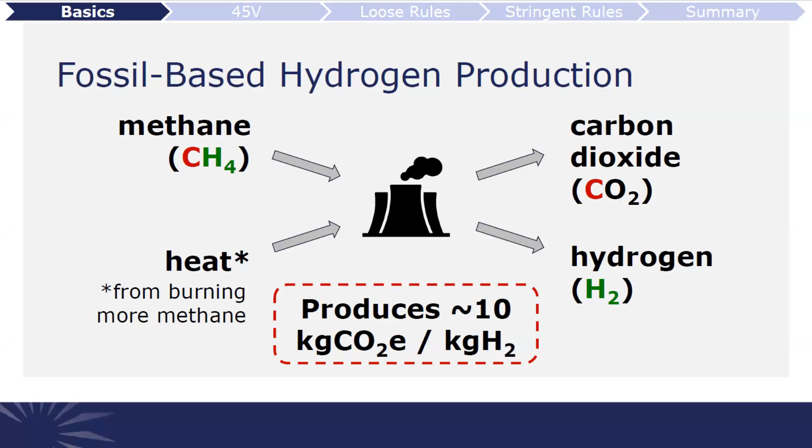So the only scalable way that we know today of making truly clean hydrogen is through a process called electrolysis, which splits hydrogen off from water molecules by using electricity. And this can produce anywhere from 0 to 50 kilograms of carbon dioxide equivalent per kilogram of hydrogen, dependent entirely on where you're getting your electricity.

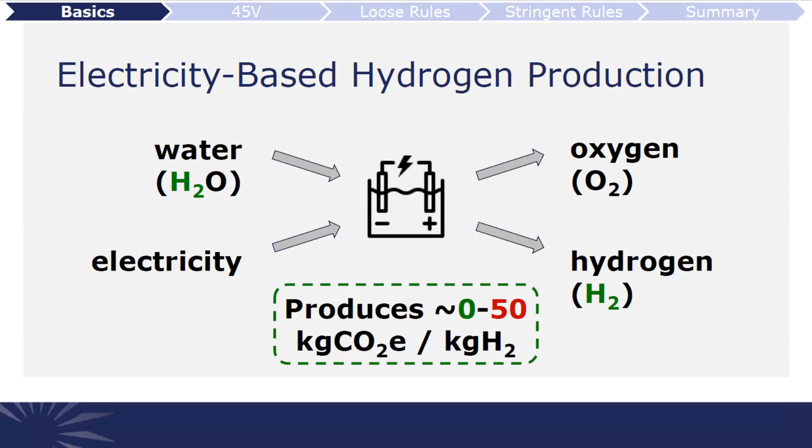So why do we need hydrogen? Well, it's mostly going to be used to decarbonize things that can't be easily electrified. These 3 waves of end uses come from the Department of Energy and where they envision it being used. So it's a lot of heavy industries, chemicals, aviation, commercial shipping, things of that nature. This helps clarify where you might expect to see hydrogen production, or at least transportation to those end uses. And second, these are really energy intensive industries. So we're going to need a ton of hydrogen to decarbonize all these processes.

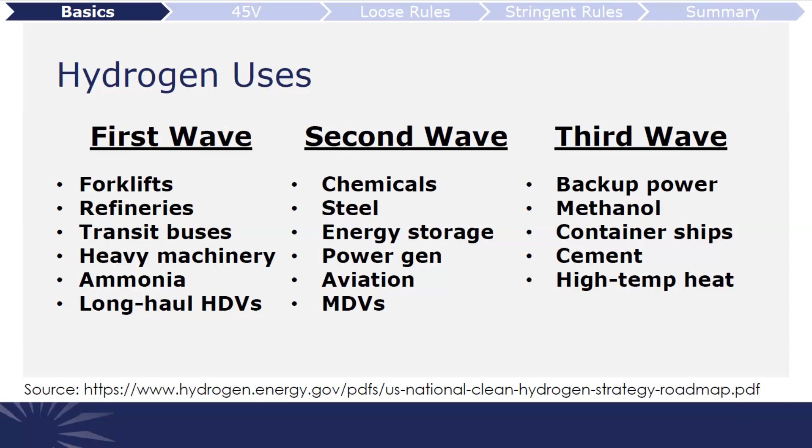So hydrogen wasn't really on the radar until a couple of years ago, and two federal laws have really accelerated its relevance. The first is the Infrastructure Investment and Jobs Act from 2021, and it sets aside $8 billion in federal funds for the creation of clean hydrogen hubs all across the country. The Department of Energy is still deciding where these hubs will be placed, but their purpose is to act as research and development for different ways of making hydrogen, using it, transporting it, and storing it.

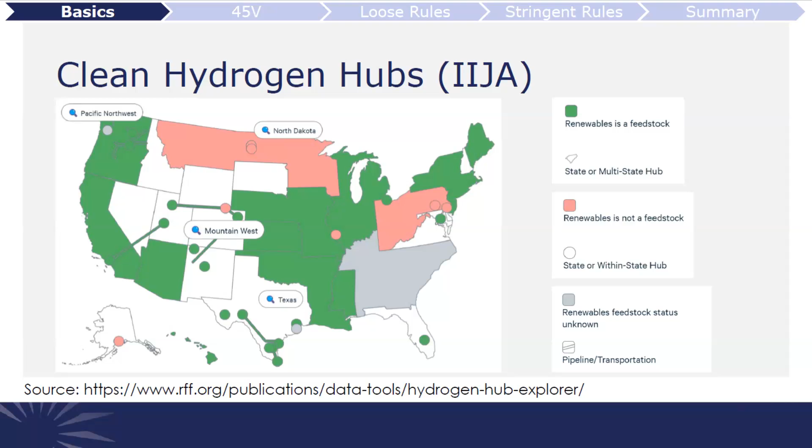And as you can see from all the green on this map, these are places where states and cities are proposing to use electrolysis as their production method. But why we're going to see most hydrogen growth comes from the Inflation Reduction Act, which has a Section 45V clean hydrogen production tax credit, and that's meant to really scale deployments.

So this tax credit is structured by paying out on a dollars per kilogram of hydrogen produced basis, and you get more money if you reduce your upstream and production greenhouse gas emissions from that process. You can see that really high orange bar of $3 a kilogram being pretty tough to achieve. You need to reduce emissions by about 95% relative to steam methane reformation.

And I can't overstate how big of a subsidy this is in power market terms. $3 a kilogram is about $60 a megawatt hour. Plus you can sell the hydrogen. Competitive rates today are $1 per kilogram. So this is an $80 per megawatt hour value on the grid from electrolysis.

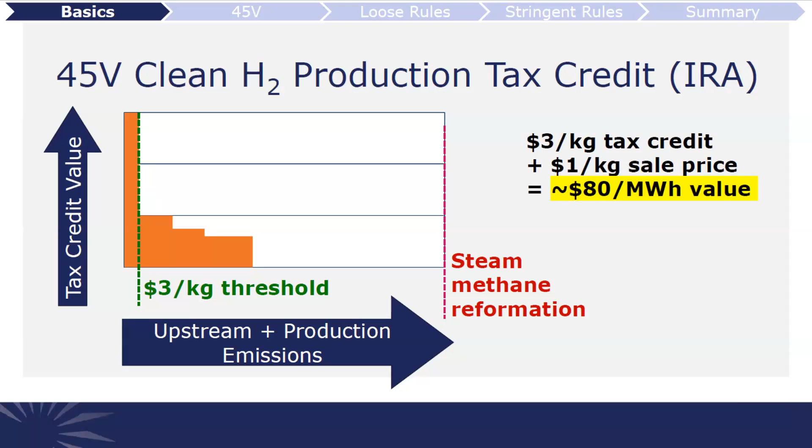So the US Treasury right now is thinking through how to design this credit. And the main question is, how do you measure the upstream emissions from the use of electricity in your electrolyzer? And that's going to really spell how this all plays out.

So how much load growth are we talking about here? Well, these are the three goals set by the Department of Energy. The one closest to us, 2030, is 10 million metric tons of clean hydrogen production. If they meet this goal, it's not going to come entirely from electrolysis, but if it did, that would be 500 terawatt hours of load growth, which is about 12% of the load we had across the country in 2021.

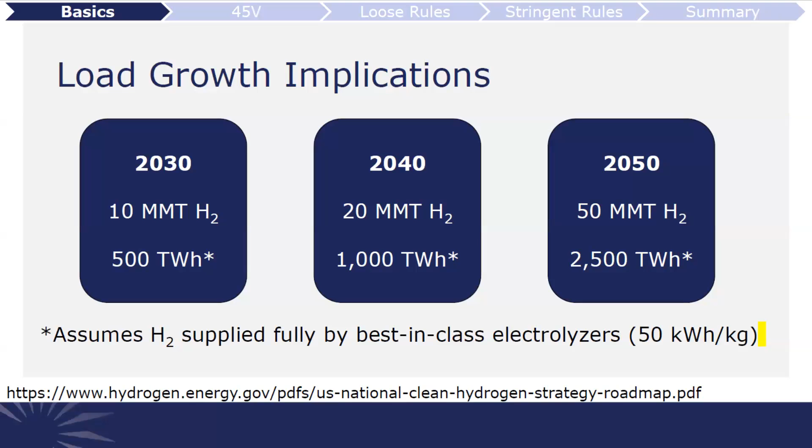So two big questions: how much of this is going to materialize, but the bigger one for today is, what type of load is this going to be? And that is going to be answered by how Treasury sets these rules.

So from a scientific perspective, the only way to actually meet that threshold for $3 a kilogram is to meet these three principles. First is additionality, which is having your electrolyzer use new sources of clean electricity. Second is deliverability, which is making sure that that clean electricity is local and accounts for transmission line losses and congestion. And third would be time matching, which is ensuring your electrolyzer runs at the same time as clean electricity generation. And Treasury is considering whether and how to implement each of these three principles, and that's going to determine the amounts of load growth, the pace, the location, and the flexibility of all of that growth.

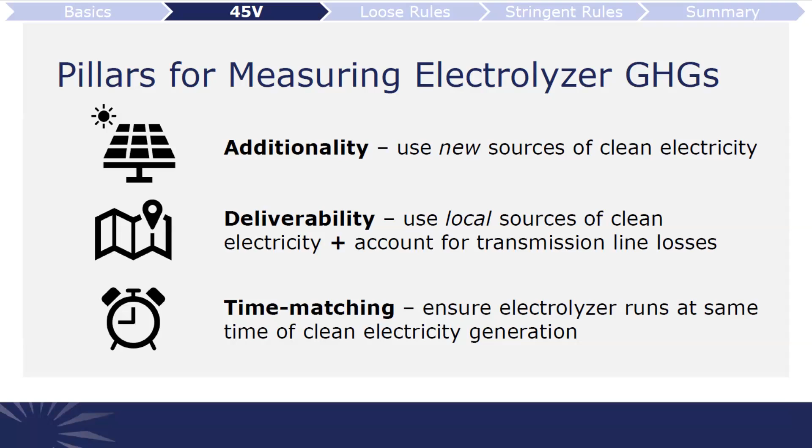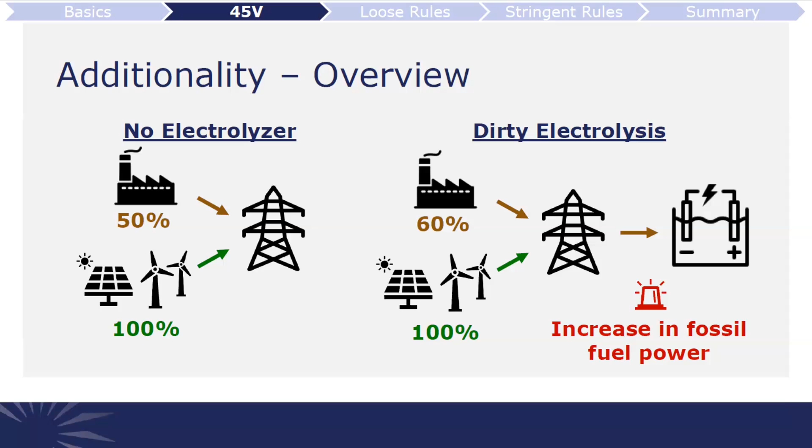So I'm just going to introduce each of these principles in a little bit more depth. If you do not have an additionality requirement, then basically what you're going to do is build an electrolyzer connected to the power grid and claim the use of existing clean electricity by buying voluntary renewable energy credits, or maybe hooking up to an existing nuclear power plant. But in most hours all across the country, renewables and clean energy at large are producing as often as they can. So the actual impact to the grid is ramping up fossil fuels, which comes with emissions.

I'm sure most of this crowd is familiar with dispatch curves, but basically if you add new load and you do not also add new supply, again, in most hours in most of the country, the impact is going to be calling on fossil fuel power plants to ramp up.

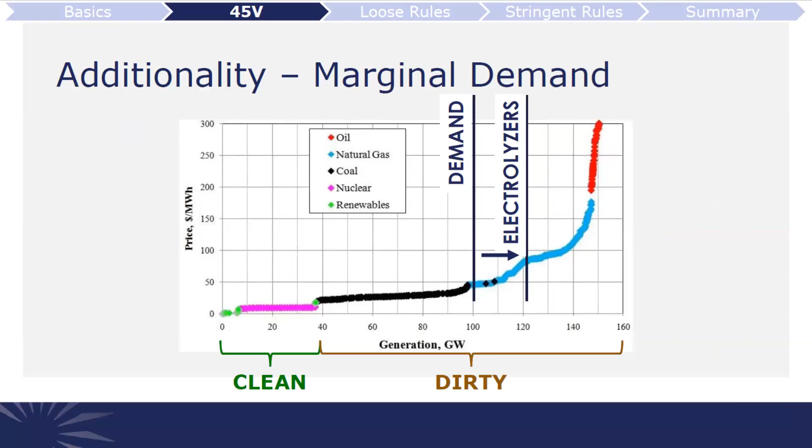When you account for these emissions in your estimates of the emissions intensity of hydrogen, then our analysis shows that you end up producing hydrogen with 2 to 4 times the emissions intensity of how we make it today through steam methane reformation. But more importantly for this discussion, you can be up to 100 times higher than the threshold for earning that $3 a kilogram tax credit.

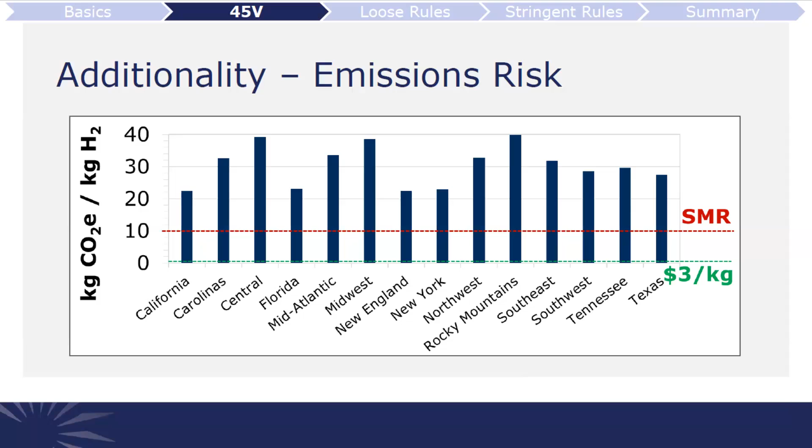So the way you address this is by having an additionality requirement. This could mean building new clean energy, uprating a nuclear power plant, or using energy from renewables that would have otherwise been curtailed.

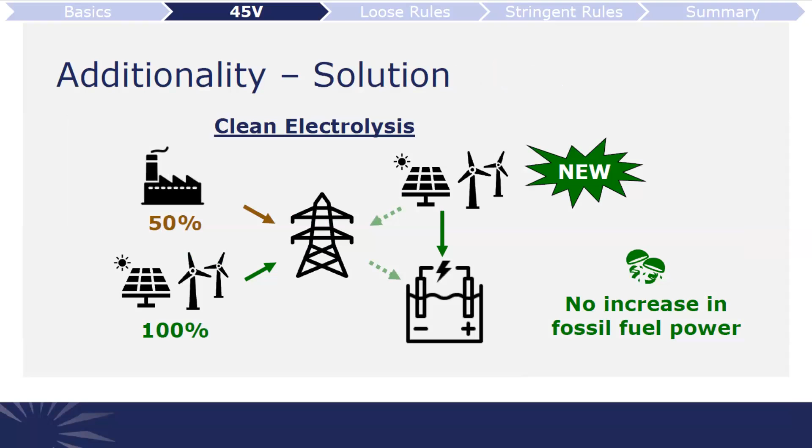For deliverability, if you don't have any sort of requirement in place, you might build your new clean energy in a place like West Texas and then site your electrolyzer in Houston, which would be logical on both accounts. But your clean energy might be displacing existing clean energy in a lot of hours due to congestion. So you might just be worsening the curtailment problem. And in Houston, you might be therefore causing fossil fuel power plants to ramp up in that area.

And so depending on where you are in the country, this can really vary, but you're looking at emissions as high as 17 kilograms of CO2 per kilogram of hydrogen, which is again well above that credit threshold. So deliverability requires building these things locally and accounting for transmission, congestion, and line losses.

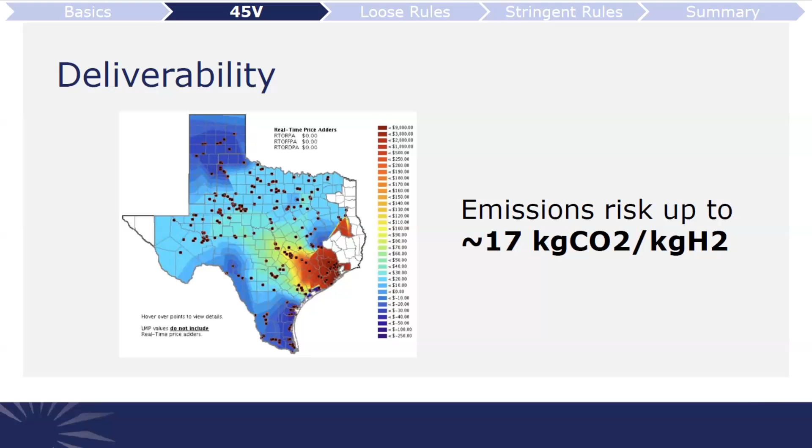And then lastly, we have time matching. If you build new local clean energy, but annually match its production with your electrolyzer's consumption, then in some hours your electrolyzer is going to be consuming more than your clean energy produces, which will increase fossil fuels. And in other hours, you'll be producing more clean energy than you use and offsetting fossil fuels. So in the short run, the emissions impact is pretty modest, but often you're still outside that threshold.

From an emissions impact, we're more worried about the long run risk here, which is that if you build a bunch of these annually matched systems, then you're going to end up displacing things that would have been built anyways. And then you're kind of right back where you started with a high emissions risk. So hourly time matching prevents this. It makes sure that you are only running your electrolyzer when clean energy is actually operating.

So there's a lot of groups out there that are kind of fighting against one or more of these pillars, or at least how they're implemented. So if you didn't have an additionality requirement, you would be able to use power from today's existing nuclear power plants and hydropower, for example. If you didn't have deliverability, you would have a lot more ease in building electrolyzers anywhere in the country.

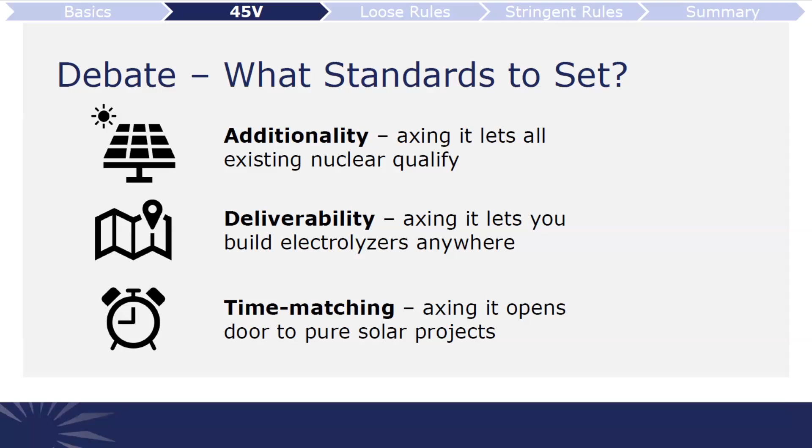And if you didn't have hourly time matching, then you could build projects like just overbuilding a bunch of solar with your electrolyzers and not having to build cost optimized portfolios. So it's really going to be up to Treasury to decide how this all comes into play. And the reason those arguments are made against these pillars is because these groups claim they're either too difficult to implement or they're too expensive. And in our analysis, we found this not to be the case in either case.

So to implement these three pillars, all you really need are two products. One is very standard in the industry, a long-term power purchase agreement signed within a couple years of new clean energy coming online. And the other is hourly clean energy credits, which is just a more granular version of the clean energy credits that we already have today. These hourly versions are already available in much of the US, and they can be scaled up before 2026.

For the economics, it's helpful to understand three different types of project configurations that you can have that comply with those three pillars. So the first is off-grid projects, where you just build new clean energy and electrolysis completely off the grid. You don't interact with your utility at all, and you would be wasting some energy, but you would probably be able to have your pick of lands and not have to deal with the interconnection queue.

In the middle, we have export-only projects, where you have the same kind of co-location project, but you connect it to the grid, and you allow the one-way sale of excess clean energy to the power grid. This is clearly compliant with the three pillars that we were talking about. And you can monetize that excess energy as well.

And then lastly, detached projects is kind of the goal. You want to be able to build clean energy in different places than you're building your electrolyzer. And to ensure that that's zero carbon, you need to follow those three pillars by having those two products that I talked about, the PPA and the hourly credits.

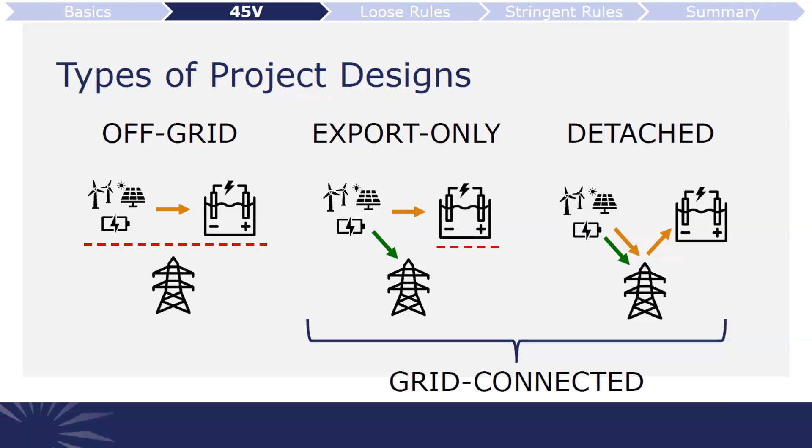Or you can ramp down your electrolyzer entirely and sell all of that clean energy to the grid at a premium, which you would want to do when power prices are above about $80 a megawatt hour. And you can already see how that would be beneficial to the grid.

You don't have to take our word for it. Princeton did a meta-analysis of all public studies, including studies from some hydrogen renewable developers, and they all agree on this. Happy to share that around to anyone interested.

So now let's get into the two possible worlds we might see depending on what Treasury does here. And these are kind of the boundaries with a lot of possibilities in between. Under loose tax credit guidance, where you don't follow any of these pillars, as a developer, you are going to build the cheapest hydrogen technology you can, so it probably won't be especially flexible. You will be incentivized to run it essentially around the clock, and you can buy voluntary renewable energy credits from existing plants for cents on the dollar these days.

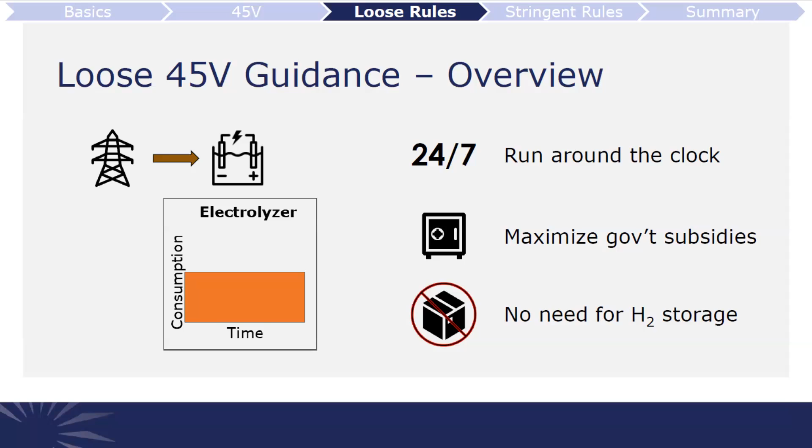And you wouldn't really need to invest in storage or pipelines because you are running all the time, so you have that steady stream of hydrogen to your off-takers who probably desire that. The reason this is a problem is you're building a system that's entirely dependent on tax credits and will never be able to get off of them. So during the subsidy period, you can buy power anytime prices are at or below $80 a megawatt hour, and your off-taker is happy because you just send it directly to them.

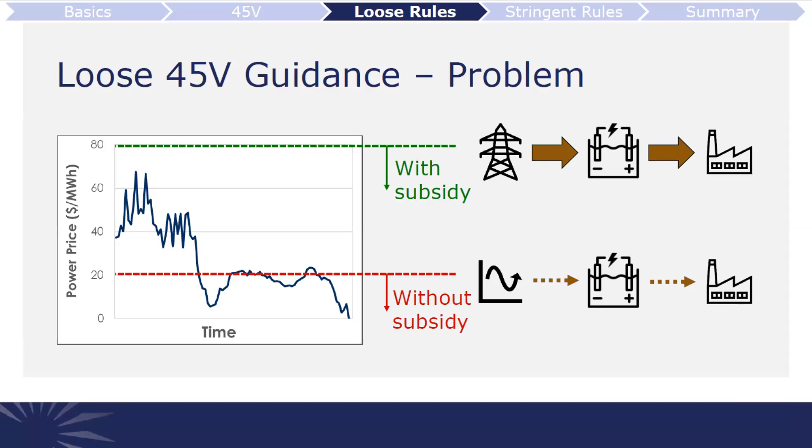Once the subsidy expires, even with free equipment and transport, the only way you can make competitively priced hydrogen is by buying power at or below $20 a megawatt hour. So you're going to have a lot less supply all of a sudden. You won't have the kinds of pipelines or storage in place to smooth those gaps in production, and suddenly your entire business is in trouble.

So for utilities, what that could mean is over the next 10 to 20 years, you see a bunch of new 24/7 loads coming online. And then either they might drop offline, which might not be a huge problem, actually. But the bigger risk here is that we've now propped up this industry and are concerned about what will happen to all the jobs and stranded assets. And so we extend the tax credits indefinitely. And then you are just kind of extending this problem as well with all these new 24/7 loads. So pretty grim future possibility.

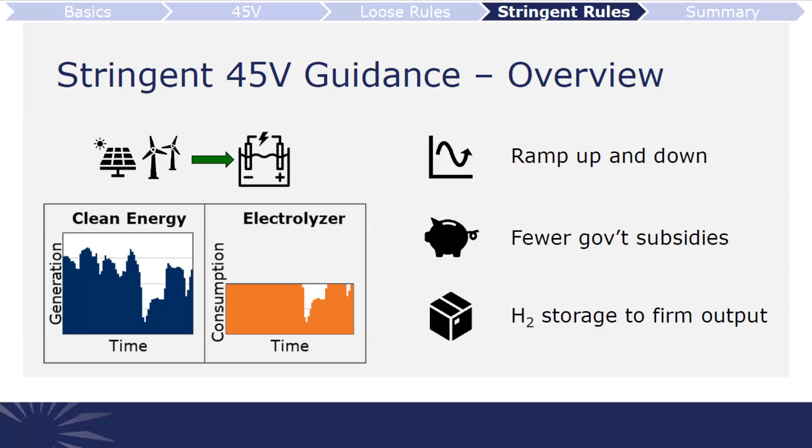If you have more stringent tax credit guidance that follows those three principles, then anytime you build an electrolyzer, you're building at least enough clean energy, probably more, to monetize or to get your load factor up. And you're building a lot more flexible units, including the balance of plant, the pumps and compressors, and the business models that you have with your off-takers. And because you're not producing hydrogen all the time, you're probably building at least some hydrogen storage or pipelines to smooth gaps in production so that your off-taker always has what they need.

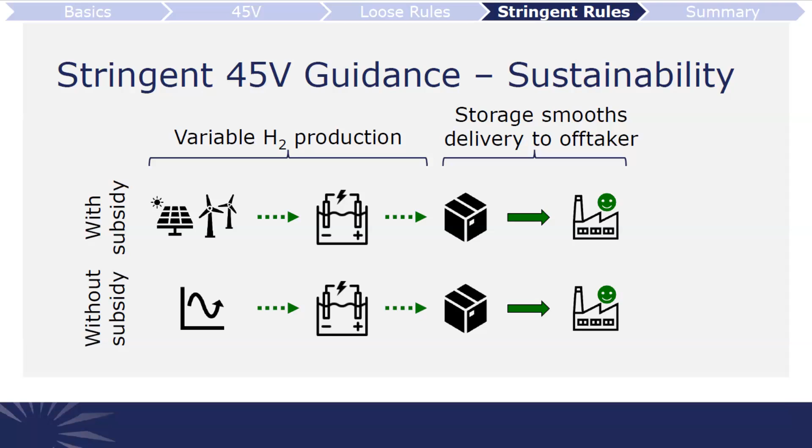So during the subsidy period, you might actually even see net load fall because you're building more renewables relative to your electrolyzer and you're time matching that consumption. And when the subsidy expires, everything is still set up for success because the electrolyzers, instead of being tied to new renewables, are now just buying power at or below $20 a megawatt hour. They're set up for that flexibility. They have the storage and pipelines in place. Everybody's still happy. These projects continue to survive and grow.

This is great for the grid because at very low power prices, you suddenly have many gigawatts of electrolyzers that are soaking up that excess renewable energy. And then when power prices rise, all of that renewable energy is made available to the grid to offset fossil fuels and generally keep the grid reliable. So it's a great base of flexible demand that as a utility or grid operator, you don't actually have to think too much about. It's going to operate on its own in a way that's beneficial to your system.

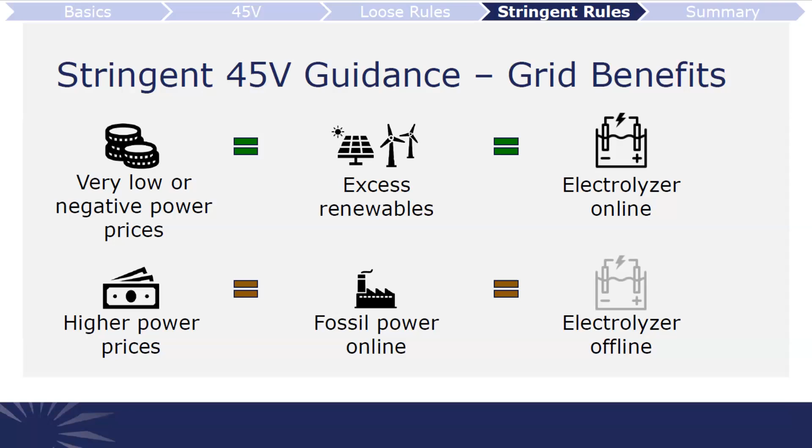So to summarize, in a world of loose tax credit guidance, you would have lots of inflexible 24/7 loads coming online all across the country. There's going to be a lot of uncertainty as to how much of this you have and how long it stays on your system.

And again, it's very power hungry, overly subsidized. Under stringent guidance, you would have more renewables than loads come online. There's this long-term flexibility benefit that you can utilize to integrate renewables and keep your system reliable.

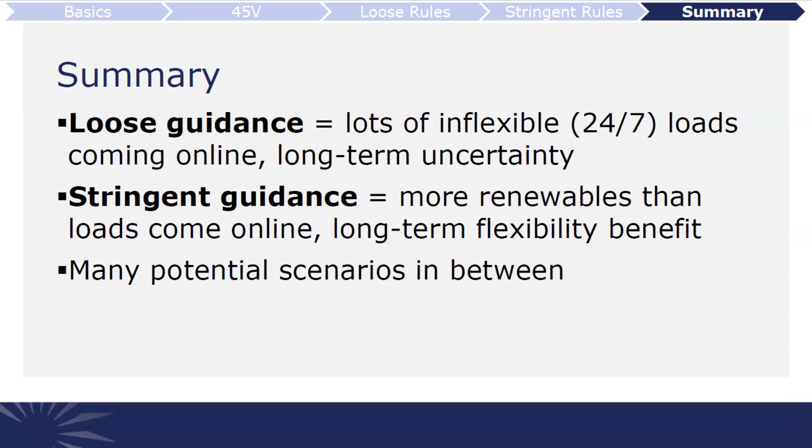And the reality is there's a ton of potential scenarios in between. We don't know exactly when Treasury is going to come out with these rules. It's kind of expected in August based on what the IRA requires, but that doesn't necessarily mean that's when it'll be released. And they might have half-baked measures of all three principles, or two strong principles and removing one of them. So there's a lot of potential in-betweens here, but I wanted to kind of give a sense of where the boundaries are of this load growth that you might expect to see.

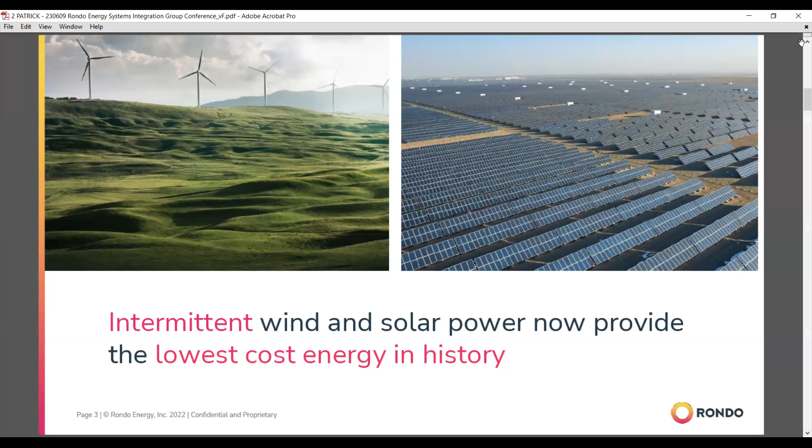For example, I'm working with a mining company in California. We're working with a large solar developer to design a solution for them, and we're seeing a solar PPA that could be as low as $22 per megawatt hour. It's a bit of a unicorn project. It has great solar irradiance, and some of the kickers on the tax credits that could get us up to the 50% investment tax credit. But either way, it's good to see that solar and wind PPA prices are coming back down.

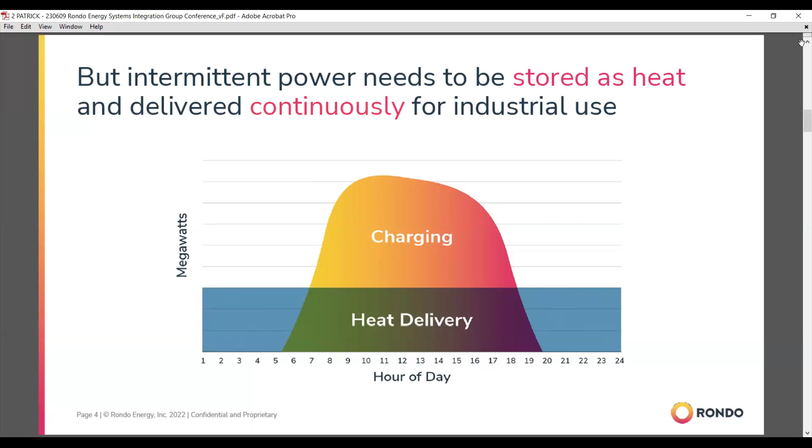We all know that intermittent wind and solar is not as useful as base load. The grid needs more continuous and dispatchable resources. So do industrial customers. Most industrial customers in process heat, most of those processes are continuous. And so we're working on designing a solution that can convert intermittent wind and solar into consistent base load heat for industrial customers. When Rondo started off, we looked at the industrial electric thermal energy storage market, ETES.

It would take, we estimated, 41 terawatt hours and about 2 trillion of installed CapEx, assuming our cost of the system. Our system, we'll get into it in a minute, but it's essentially brick. Brick is fairly cheap compared to batteries. And so about 2 trillion of CapEx.

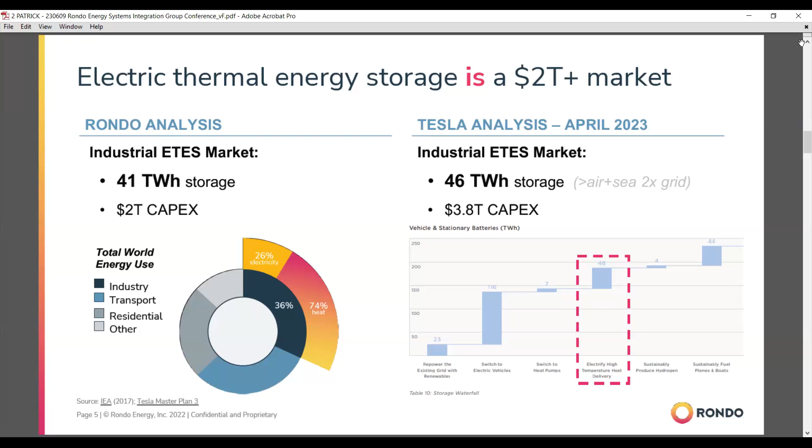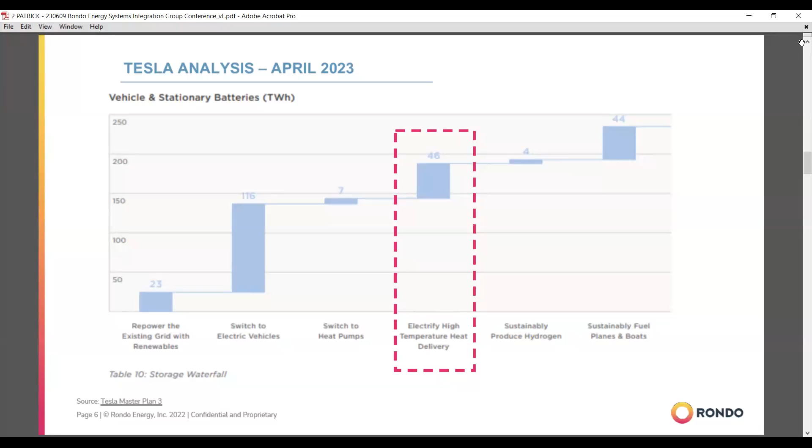And what I think is really interesting about this chart is you start with the first waterfall bar on the left, repowering the existing grid. This is global with renewables. How much, presumably, battery storage would it take? About 23 terawatt hours. But to electrify high temperature industrial heat, about 46 terawatt hours of installed storage. So a huge market potential, of course.

I promise to keep this section short, talk a little bit briefly about Rondo. At its core, it sounds very simplistic, but we're developing an electric thermal energy storage system, a heat battery that is essentially a large brick toaster. We build bricks, we put them in a box, we take electricity, we heat it up with large toaster wire. It's not toaster wire, but it's just large resistive heaters. Heat that brick up to 2,500 degrees Fahrenheit, and then blow air through it, just like steel blast furnaces have been doing for 200 years.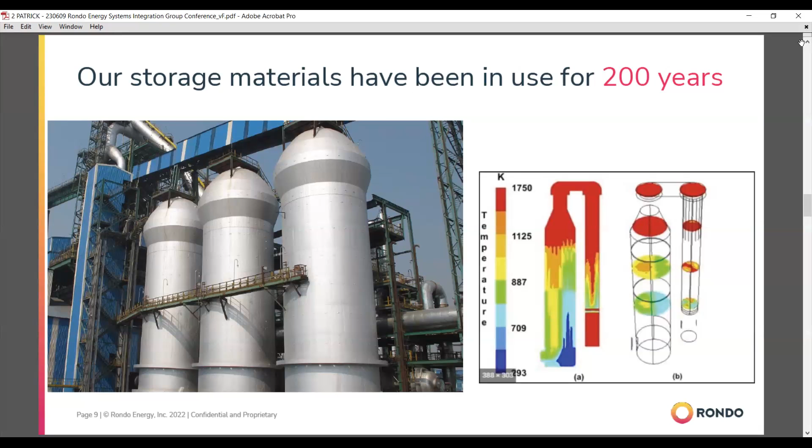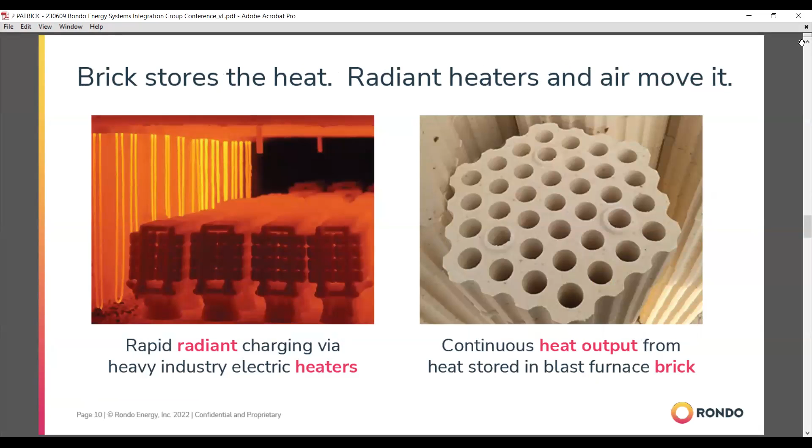This is a Cowper stove connected to a steel blast furnace. Hot gases come off the furnace, go through a stack of bricks, recover that heat. Fresh air then goes back through the bricks when it's time to bring fresh air back into the blast furnace, recovering that heat. So we essentially do the same thing, but slightly differently. We're heating the bricks up with wire. And then the form factor of the brick is slightly different. It's a high alumina fire brick, same kind of brick material in a different form factor. We blow air through it to recover the heat and then produce hot air or steam.

To put some numbers, a typical system, we have several building blocks. We have a 100 megawatt hour unit that is going into construction right now. But ultimately, we want to be producing 300 megawatt hour units or even 1,200 megawatt hour blocks. The 300 megawatt hour would look like this: up to 70 megawatts of input power. We don't have to use 70. We could use less, or it can ramp up and down. Store 320 megawatt hours, and then produce 20 megawatts of thermal heat around the clock. So this is the basic numbers.

Our second unit, a 100 megawatt hour unit, is starting construction right now. We just broke ground. That'll be producing steam for enhanced oil recovery in California. Right now, many oil fields in California and around the world burn natural gas to make steam to inject underground to extract more oil. In this case, we'll be building 20 megawatts of solar coupled directly to the Rondo heat battery and producing renewable steam to reduce the carbon intensity of this oil field operator's production.

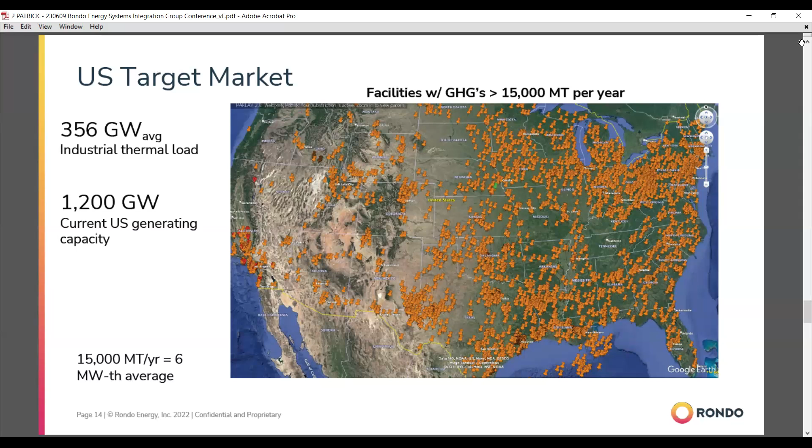If we want to make this clean and not just be shifting the incremental load onto existing coal and gas units, then we need to build a lot more renewables. And assuming maybe a 30%, 40% capacity factor, back of the envelope, we need to install another 1,400, 1,500 gigawatts of new renewables, doubling the capacity of the current generation system. We're talking very large load potential here and important implications for the climate. So that's one end of the spectrum.

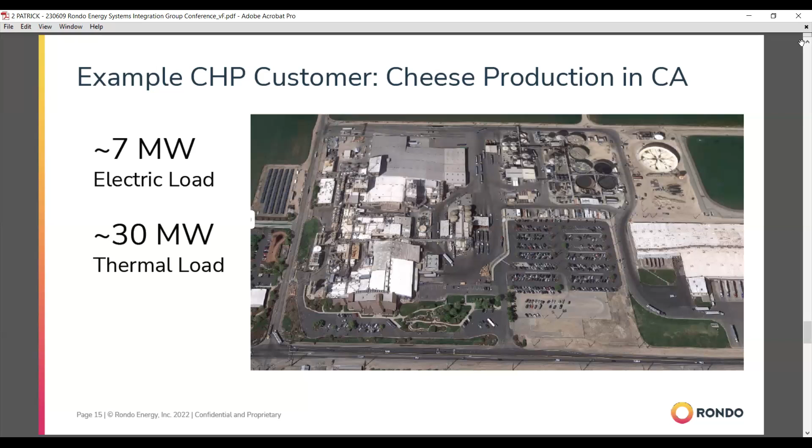Let's talk about a specific customer, cheese production in California. This is a plant making cheese. They use about 7 megawatts of power, pretty much base load. They use about 30 megawatts equivalent of natural gas for process heat. And a couple solutions. We could design a grid-connected solution, or we could do directly connected off-grid renewables to power the Rondo heat battery. I'm going to explore both of those and what that means for electrification.

Unfortunately, most of the market rules in the Southwest Power Pool don't allow direct access. You have to work through a utility under a tariff or work with that utility to craft a pass-through tariff of wholesale rates. We've seen a few examples of those kinds of tariffs, but it's not a sustainable business model to have to knock on each utility's door and negotiate a custom tariff. So the Southwest Power Pool is pretty much off limits to us right now, unless there's direct access.

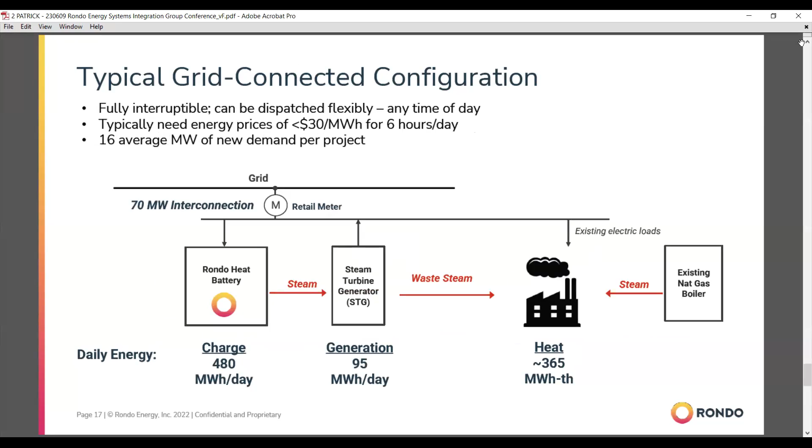The key point here is this is a load growth opportunity for utilities and independent power producers. The second opportunity, which I think, to be honest, is where most of our initial projects will be, and most of our projects might be in the long run: the complexity of charging from the grid and the regulatory barriers are such that probably most of our projects will just build dedicated, co-located, off-grid renewables that only charge the Rondo heat battery.

We will most likely supplement most of these projects with a high-pressure gas boiler, so we can run that steam turbine generator 24/7 to produce base load power and heat for the customer. Many people may wonder, well, aren't you trying to decarbonize? Why would you put in a high-pressure natural gas boiler?

Well, if we didn't do that, say it's coupled with solar and there's not enough solar happening in the wintertime, the industrial customer will be firing up their existing natural gas boiler anyway. This is a more efficient use of natural gas to produce both power and heat, and it's economically compelling as well. So this configuration represents a net loss of load to the utilities and a loss of revenue.

We're continuing to work through all of the regulatory issues, and at the highest level, it makes a lot of sense to be able to charge from the grid to sop up extra renewables, things like that. Right now, we see more roadblocks in place for doing that, and it's going to take time. So I think in the short run, most projects that we work on will probably follow this configuration, which is a loss of load to the grid, or a reduction in load.

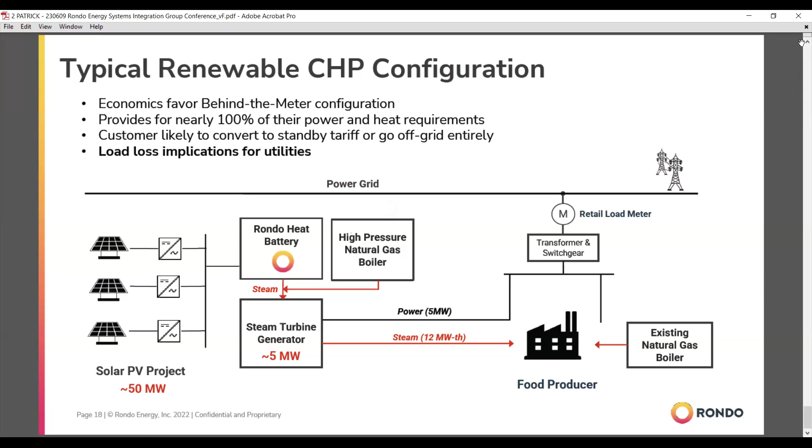At Schneider Electric, we help our customers in their digitization effort through innovation and solutions. And specifically in my area of expertise, we're helping our customers to build energy efficient data centers. So what I would like to do in the next 20 minutes is take you on this journey to see how we and our industry are looking at the consumption of electricity, where we see the future going, how we create this flexibility, and what it actually means to the utility providers.

First and foremost, I want to start with one word, and it's digital. Whether we like it or not, we're living in a digital world right now, whether this is our cell phones, or in industries and hospitals, hospitality, manufacturing processes, digital warehouses, everything's getting smarter. And so we're creating more and more data, and somehow this data needs to be stored, processed, transported, and that consumes an enormous amount of energy.

And this is the interesting part: we consider ourselves right now to be living in a golden age, because there's no end in sight. It just keeps growing and growing. And so it's good for our industry, and at the same time, it produces a lot of challenges we're trying to help to solve.

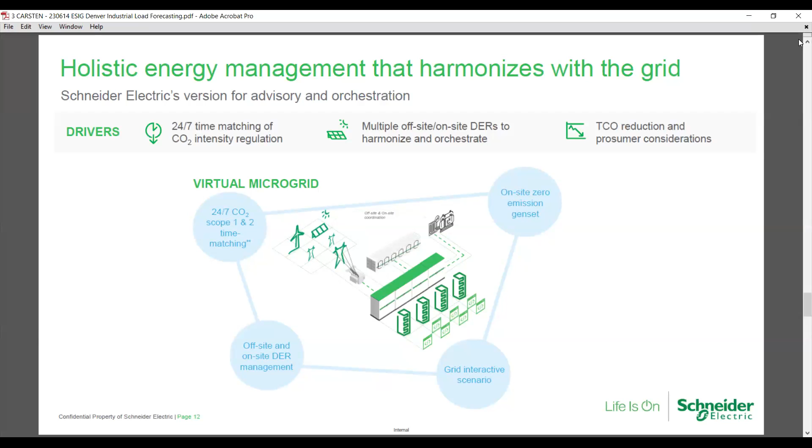Now, the industry and the Googles and others are really shifting towards 24/7 carbon neutral operation all the time, not just on an annual basis. And that causes a new challenge. So we see that these virtual microgrids, with on-site and near-site power generation, will be able to facilitate that, including load shifting. But ultimately, it's all about using multiple distributed energy resources to accommodate a 24/7 carbon free data center operation.

And since hydrogen is also a big conversation in the data center industry, I found what I saw earlier today interesting. So we're looking at the round trip efficiency, right? And you mentioned the heat battery.

I like this actually. I've learned a lot already. Thank you so much for that.

With an efficiency of, what did you say, 98 or 89%, but pretty high. So pretty high. Gas is of course also considered for backup generation and so forth. So when I look at this, I have a 50% efficiency for natural gas, and then steam reforming, and then using hydrogen. We just talked about it earlier. So you guys are way more experts than I am.

But traditionally, when I look at it, the third row, buying the electricity from utility companies is actually pretty efficient. Right? I mean, yes, I have my transmission and distribution losses and so forth, but it's somewhere around, give and take, 80, 90%. So that's pretty good in comparison to the alternatives.

However, because of the sustainability aspects and becoming more flexible and adaptive and more in control of your own destiny, the idea of using hydrogen, and Microsoft is pushing the envelope really hard, and last year they did a 3 megawatt demonstration where they produce hydrogen through electrolysis and then power a data center, and they're going to continue in this effort. But here we are somewhere between 25 and 30% of efficiency.

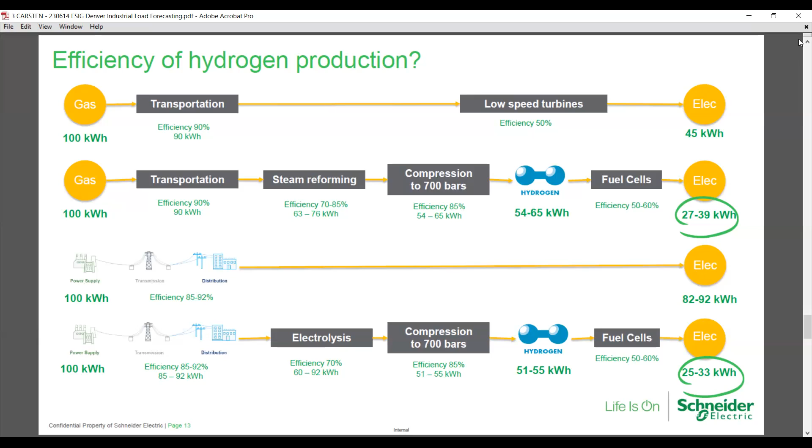All right, so the key takeaways: data center capacity will continue to grow, and that's true for both the hyperscalers as well as the edge data centers and edge compute locations everywhere, although less of a challenge. And data centers are looking for ways to become more autonomous from the utility companies and also becoming prosumers. Sometimes produce electricity, sometimes consume it, and work closer together with the utility companies.

And then 24/7 sustainable energy matching will be kind of the holy grail for the data center, and the efforts are already well underway, and we will see more to come.

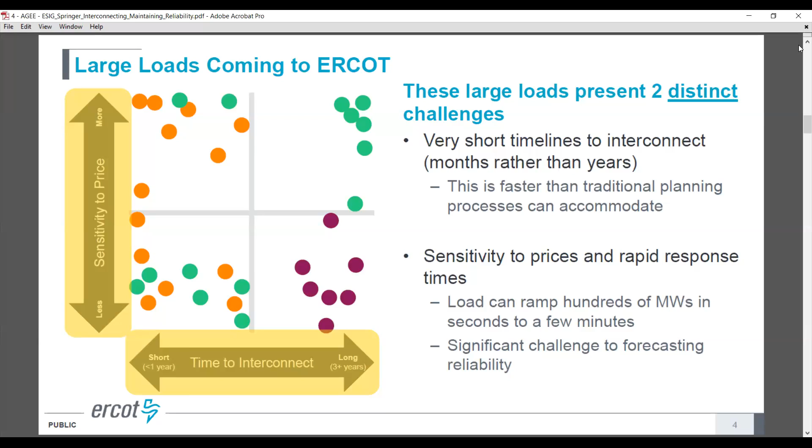Before jumping in on the details, though, this is a more detailed look at the high-level 42 gigawatt number I presented yesterday, which is just the amount of loads that have a short timeline to interconnect, so faster than those existing planning processes. This is an overview of what we're tracking. And the 42 gigawatts really comes with a bunch of caveats. The first is, we have a number of projects that provided basically nothing more than a location they want to interconnect and a megawatt amount. They haven't provided any interconnect studies or anything to make us think they're real, including a date. And so those all go into that 2027 bucket.

There's also a number of projects that have moved through this interconnect process and had some of their megawatts approved for interconnection, but not all due to reliability limitations. And for those, we're still in a lot of cases waiting for indications from the customer about whether or not they want to wait for transmission upgrades to connect the rest of the load. And so those all get lumped into 2027 until we know what the customer wants to do. So that gives us kind of the worst possible scale.

But really, if you focus in on the 2023 bar, I think that's maybe a better look at what we're expecting. So there's 2,600 megawatts that are approved to energize now. They've already gone through reliability review. Another 4,300 have had their planning studies approved, but haven't yet been modeled or moved into the production systems to get approved to energize. And then there's another 8 gigawatts that are under active review. I think that's a better indication of the scale of what we're expecting in the near term, somewhere between, let's say, 8 and 15 gigawatts of large load.

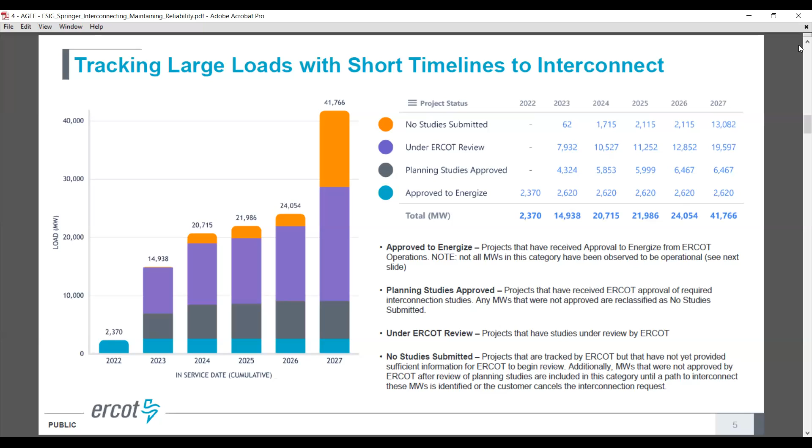Now, remember, the peak load of the ERCOT system is 80,000 megawatts. So that's still a really significant amount of large load that's coming. But I just wanted to show the graph because it also highlights a lot of the uncertainty that we're seeing. It could be as little as 5 gigawatts, but it could also be as much as 40, and that's a pretty big range when you're trying to plan and to forecast.

So I'm going to focus in now on these short timeline to interconnect loads and talk about how we're addressing them in the planning time horizon. As I mentioned, this short timeline to interconnect is really faster than our existing regional planning group and regional transmission plan processes were designed to handle. And it's definitely faster than any transmission upgrades could be built unless those upgrades were already approved and under construction for other justifications. And those things combine to say, okay, we don't really have a good process right now to ensure that these interconnections are actually reliable for grid stability.

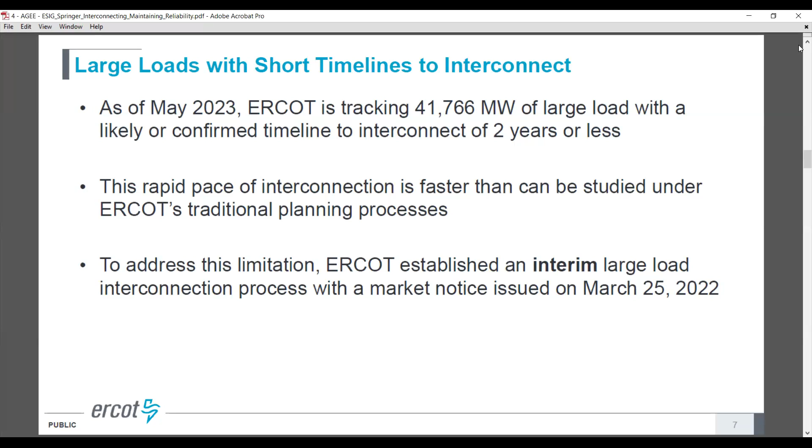So ERCOT established in March of 2022 an interim interconnect process to kind of govern the interconnection of these large loads. A couple points I want to make before I talk about how it actually works. The first is that the need for this interconnect process was driven entirely by the speed at which these loads want to connect to the grid. It has nothing to do with their flexibility.

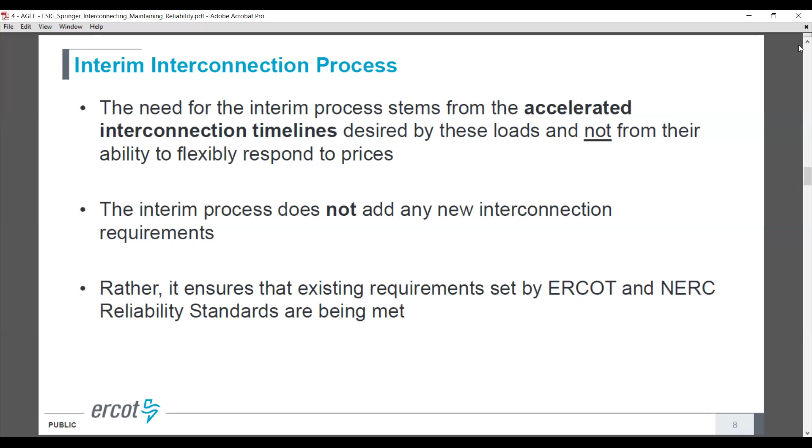If Dow Chemical came to us and said, we want to build a new facility in 12 months and it's not going to be flexible at all, it would still have to go through this process. So it's really just the speed to interconnect that's driving the need for this. It also doesn't add any new interconnection requirements in terms of what has to be looked at. It's really more there to ensure that the existing ERCOT and NERC obligations are being fulfilled. And again, that ERCOT is meeting its reliability obligations to the system as a whole.

So who has to go through it? It's basically the loads we've defined as being large loads that I talked about yesterday. So any new load that is 75 megawatts or greater, or an increase of an existing load of 75 or greater within 2 years has to go through. If it's co-located with a generation resource, that number drops to 20 megawatts. And again, that's just because it's a material modification of the generation resource.

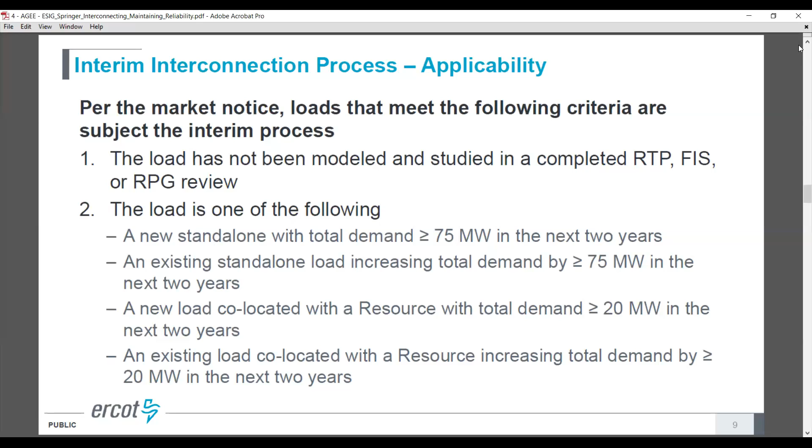There's also a caveat if it hasn't been studied in any existing process, which now this process has existed for about 15 months. So there's no loads going through that were studied in an earlier process. Anything coming in now is going through this interim process. The process itself is basically 3 phases. The first is ERCOT review of required interconnection studies.

So just with all our other planning processes, the transmission service provider is the one that has the direct relationship with the customer. So the TSP performs the reliability studies, identifies the transmission upgrades that would be required to serve the full requested load. What is new is that those studies then come to ERCOT for review. And ERCOT is going to be looking at the system along with approved transmission upgrades that are already in process to determine how much load can actually be served while meeting reliability requirements by the customer's interconnection date.

Remember, it's within 2 years, so this is faster than any new transmission could be studied, approved, built. So ERCOT is there to ensure that we basically figure out how much load could actually be reliably interconnected when the customer wants to come online. And ERCOT sets a limit based on the reliability criteria that remains in place for the customer until new transmission is actually built.

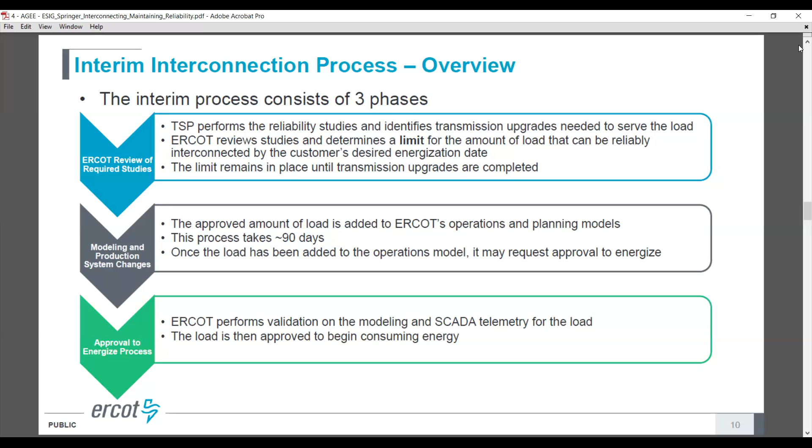Once the limit has been set, then the customer is able to get into the operations models, the future planning models, and then once it's in those models, then it can move through the approval to energize process where the telemetry is validated, the modeling is validated, and then it's approved to begin consuming energy. So the later stages are basically identical to our other planning processes. It's really that first step that is new and, again, driven by the fast timeline to interconnect.

Now, even though this process has existed for about 15 months, it's still relatively new. And because it's interim, it also has a lot of limitations. A few of the big challenges: tracking of load ramping schedules is very ad hoc. It's not only driven by the customer actually getting their load equipment on the ground and energized, but also a lot of times there's load increases that are conditioned on a transmission upgrade coming into service.

So we may have a customer that wanted 300 megawatts and we say, okay, well, you can have 150 now, but there's already a transmission line under construction that would allow you to get to 220. And then we have to track, and the TSP has to track when that upgrade actually comes in before we allow the load to consume more. So there's no standardized way of doing that right now. Each TSP has kind of a different methodology.

So it's a very fluid situation that will be addressed with more formal rules probably later this summer. There's also a natural transition between the interim process, which is kind of 2 years or less, and longer term growth of the load, which would be handled under existing planning processes. And the customer may have a projection of load growth that spans both time periods. And so the question has come up, well, how do we draw the line between what is governed by that interim process versus what is going to be handled in the longer term traditional planning processes? So that's still being defined.

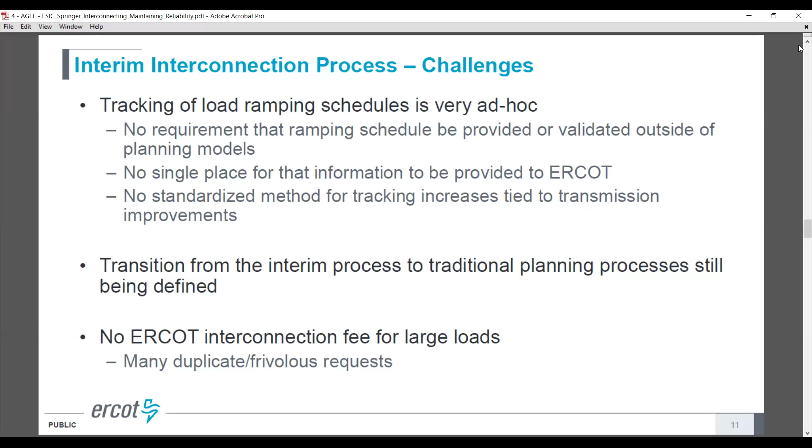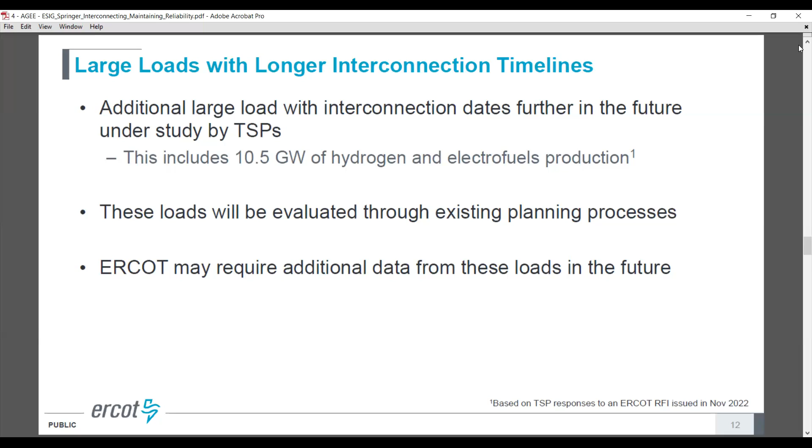So, just to tie it back to some of the other topics we talked about. This panel has focused on industrial customers that tend to have longer timelines to interconnect. And so, of course, the question comes, what about hydrogen and some of these other large industrials that are further out in the future and how fast they want to come on the grid? Those are going to continue, at least for the time being, to be addressed through the regional planning group process. What is probably going to be different is that because of the size of the loads and their ability to throw the grid around that I talked about yesterday, we probably will look for additional registration data from them to aid in load forecasting, which takes me to load forecasting.

If I had to really describe for large loads the big challenges we're seeing, it's two buckets. The first is the growth of the load is really hard to predict, and it's compounded by the fact that the load is flexible. So what is its contribution to peak? That's hard to predict. The behavior of the load is also hard to predict. When is it going to be flexible? The question marks we have really feed into that.

So for the growth topic, one of the big things we're seeing is that the load itself is actually lagging from when we approve it. I mentioned the 2,600 megawatts of approved load. The actual consumption we've observed is only about 2,000 megawatts. So there's a lag from when we approve it to when that load actually shows up. And that's, I think, driven mainly by the fact that most of it's Bitcoin and data centers right now. So those loads are really modular. The vast majority of the consumption is driven by either the mining equipment or the servers that are actually installed.

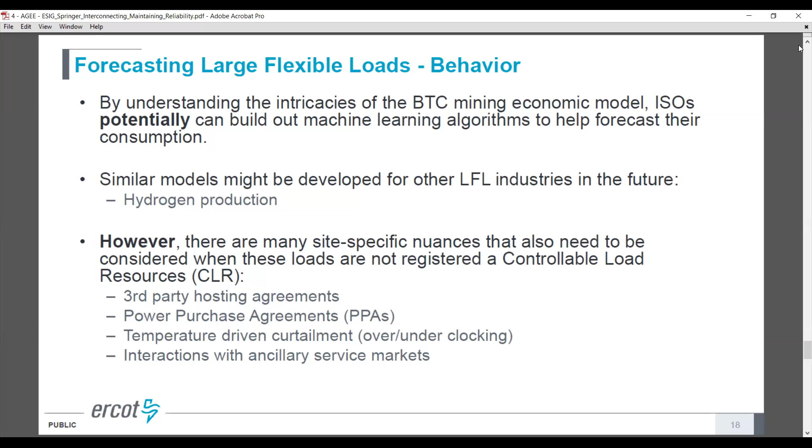And we've also been looking more at temperature-driven curtailment. Especially for the air-cooled data centers and Bitcoin mines, there potentially is a temperature effect where they may choose to either underclock or overclock their processors to gain efficiency or to gain speed. And that also affects how much energy they're consuming. So lots of different nuances make it really challenging to forecast these loads.

I'll also make the same plug I made yesterday, which is having more data is good, but having registration and participation in the market as controllable load resources is better, because then we are provided with a lot more data on the incentives that drive flexibility. And that, in addition to the operational benefits, I think helps us with forecasting as well.

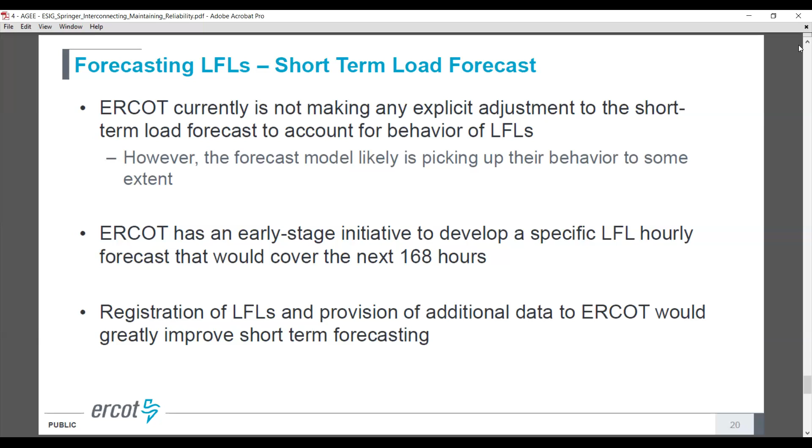For the short-term load forecast, at the moment, ERCOT is not making any explicit adjustments for large flexible loads. The number in operation was much smaller last summer. We are in the early stages of an initiative to generate an LFL-specific forecast that would look at the next 168 hours. And I should add our existing model probably is picking up some of the flexible behavior, just looking at the historical inputs it's getting, but an explicit forecast would help. And again, the more that are registered as controllable loads, the better our data is, the better our forecasting is going to be.

So that gives an overview. I think maybe my biggest takeaway is just there's a lot of uncertainty right now, and it exists at every phase from interconnection all the way through operation, and so that makes forecasting challenging. But certainly the industry is changing, and there's a lot of new loads showing up. Hopefully we'll talk about that more in the Q&A.